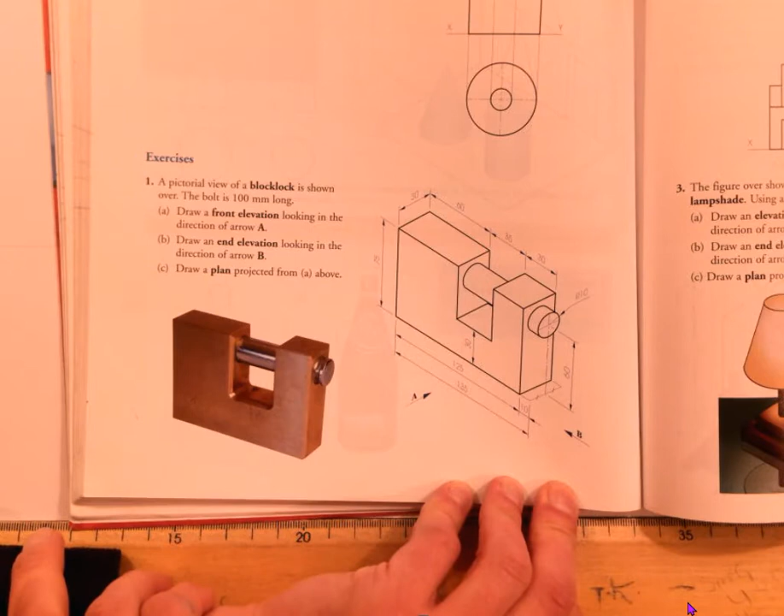Draw a front elevation looking in the direction of arrow A. Draw an end elevation looking in the direction of arrow B. Draw a plan projected from A above. So we go through the drawing.

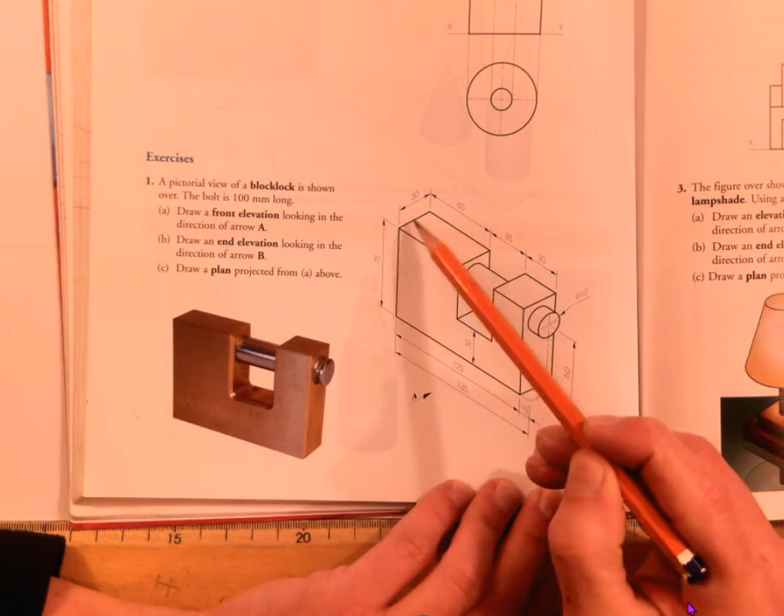I can see that the overall width, and it's not exactly clear straight away because it's a 125 and 135 mm measurement. The overall width, 135 millimeters. Overall height, 75, and the depth is 30. So from front to back, the depth is 30 millimeters.

So we go and we begin setting that up. So we said it's 135 wide by 75 high. So we're starting with our elevation. I put my XY line in already. Elevation, we're making it overall 135 and overall height 75. At that stage I can set up my outline elevation. Here is my outline elevation.

The elevation is broken up in the drawing, so there's measurements there, you can see them. We have 60 millimeters to step over to the start of the recess for the lock. 35 millimeters wide is the section for the recess of the lock, and then the end of the lock is a 30 millimeter measurement over.

So I've stepped over 60, 35, 30, and I've set up grid lines for those. So just light construction lines. All of this is very, very light. The recess of the lock comes up 30 millimeters from the bottom. So from the base up 30 millimeters. And I come horizontally.

And at that stage I can actually draw in the outline of the lock itself. The bolt or the pin has to be put in afterwards. So my outline of the lock is there, and that's pretty straightforward.

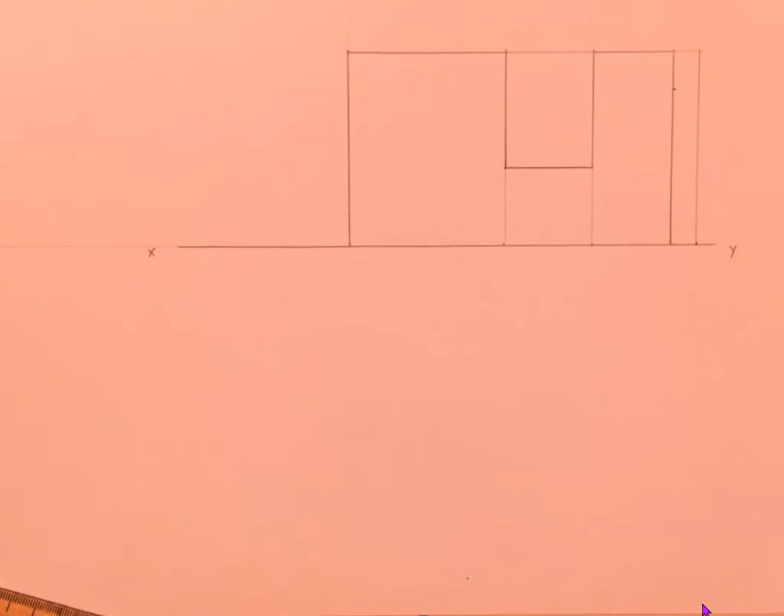To the center of the pin, so the pin has to come at the side here, to the center of the pin it says we have to come up 60 millimeters. So I measure up 60 millimeters to the center of the pin. That is a center line that's going to go on there. So in other words, the center of the pin is going to come along there.

In the question it says the pin itself has a radius of 10. That means it's got a diameter of 20. So it means the pin overall is 20 millimeters, meaning I have to step up 10 and down 10. And at that stage I can draw in the pin. So the bottom line of the pin is there. Top line of the pin on the lock is there. That is my elevation drawn in.

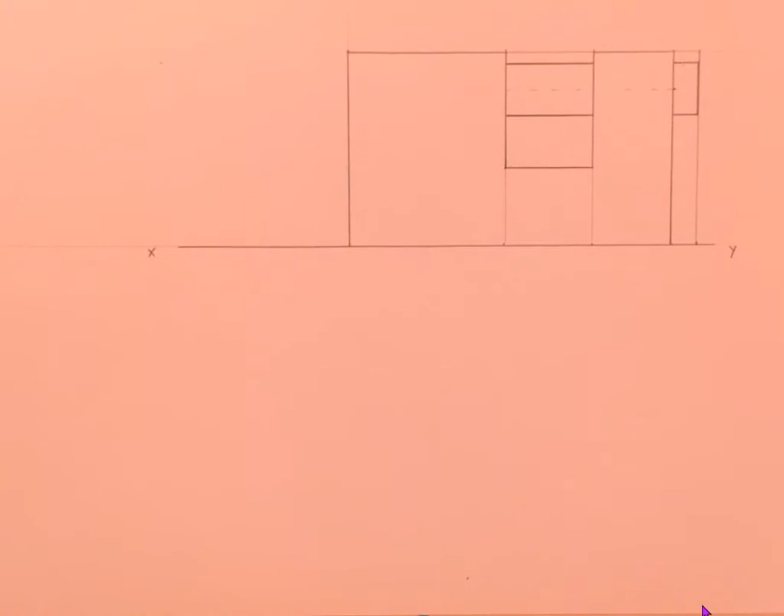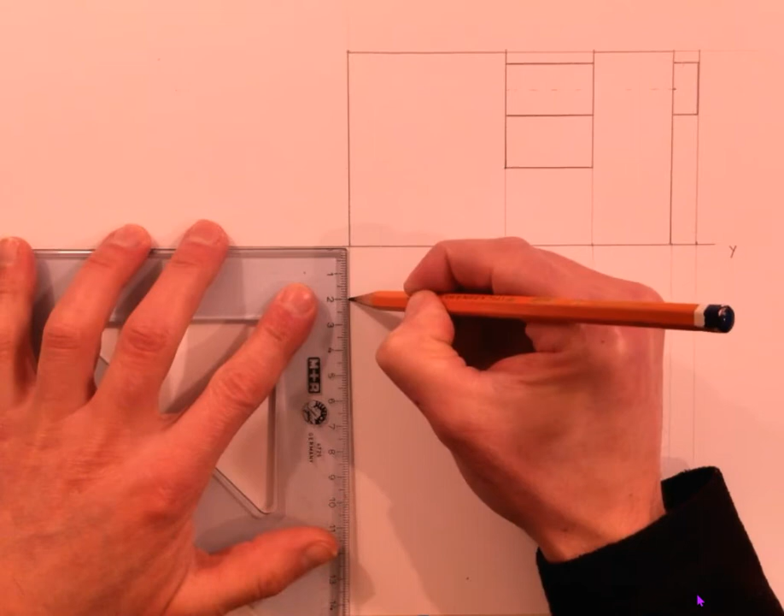Now I come along and project the plan view of that. Plan view is always projected from the elevation. So I take down my overall width, but I'm also going to take down the position of that recess that I was talking about, the end of the lock, and the far side of the pin. So all those measurements are taken down nice and lightly. We step down 20 mm always to start our plan view. So I lightly put in the start of the plan.

And we said in the question from front to back it was 30 millimeters deep. So 30 mm down. Once again, I can draw in the shape of the lock itself and the pin afterwards. So my lock without the pin is pretty straightforward. Here is my lock. But I need to put the pin into the center of this.

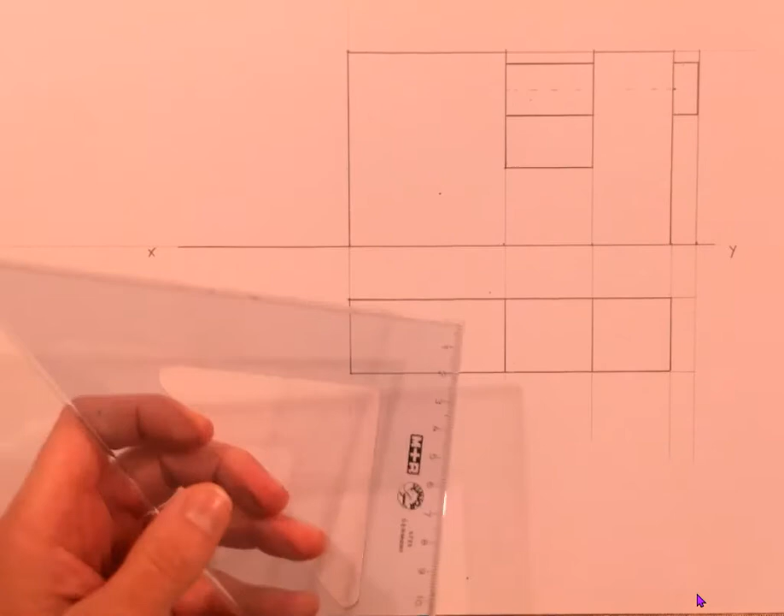So I need to find halfway. I'll step down 15 millimeters here because it's half of the 30, and I'll put my center line on again. So anytime we're dealing with something in the middle of an object, we put on a center line. There's my center line in.

Just as the elevation, it said the diameter of the pin is 20 millimeters. We need a diameter 20 pin in plan as well, the same, so I do the exact same again. Step up and down 10 millimeters. And then I can come and draw in the pin itself in plan. So that is my plan view looking down on top of the lock.

And that's it drawn. I have to come along now and project my end elevation. The end elevation, the view B, was looking in from the right hand side, meaning my end view is going to end up on the left.

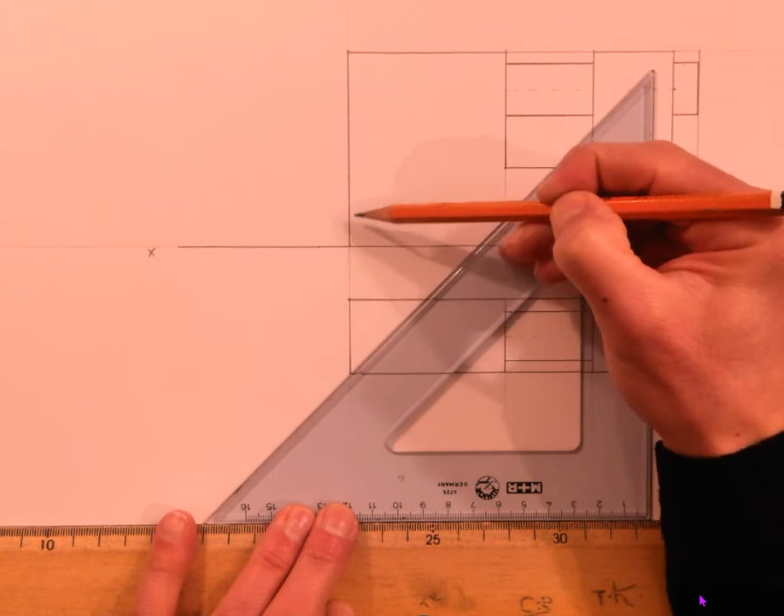The correct way to set up an end view is we have to use the elevation and plan to create an end view. To do that, we take the edge between the elevation and plan, this edge here, and where it hits the XY line, that point. From that, we're going to take out a construction line. I'm going to show it with just long broken lines. So we take out a construction line.

And what we're going to do is we're going to use the heights from elevation, and we're going to use the depths, so the front to back measurements in plan, to create our end view. To do that, I'll take the overall height of the lock over from my elevation, so lightly across, and I'm going to take the depth, so from front to back, from the plan.

To do that, I just come horizontally with my T-square and vertically from where it hits the line. So the line comes out, hits the 45-degree line, and up. I do the same with the other line. Across, hit the 45-degree line, and up.

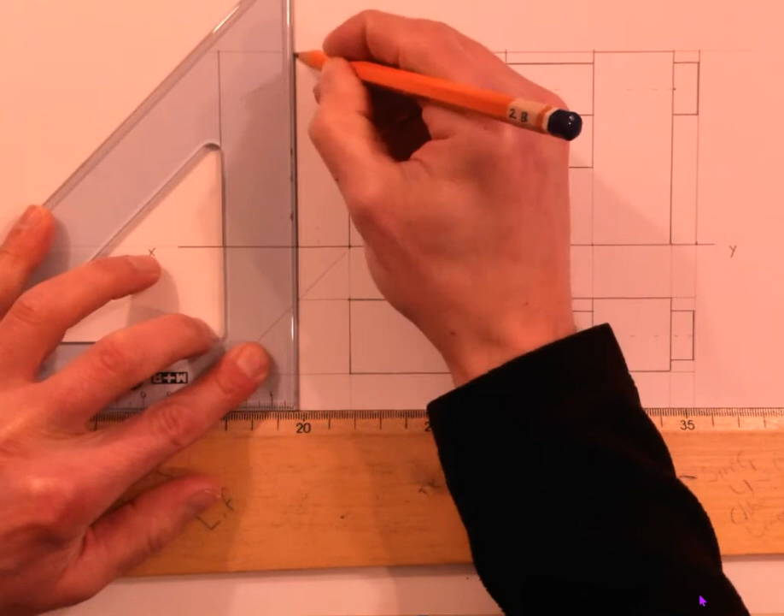And so what I've done is I've taken this 30 millimeter measurement and I've copied it into the end elevation. And that gives me the outline of the lock. So without actually using a measurement on the set square, I can redraw the end view.

Now what I'm going to do is take the center point of the pin, here's the center point of the pin, across into the elevation, because the height is going to be the same. So I take my center point across. So a center point comes straight across. The center point of the plan as well is going to come across.

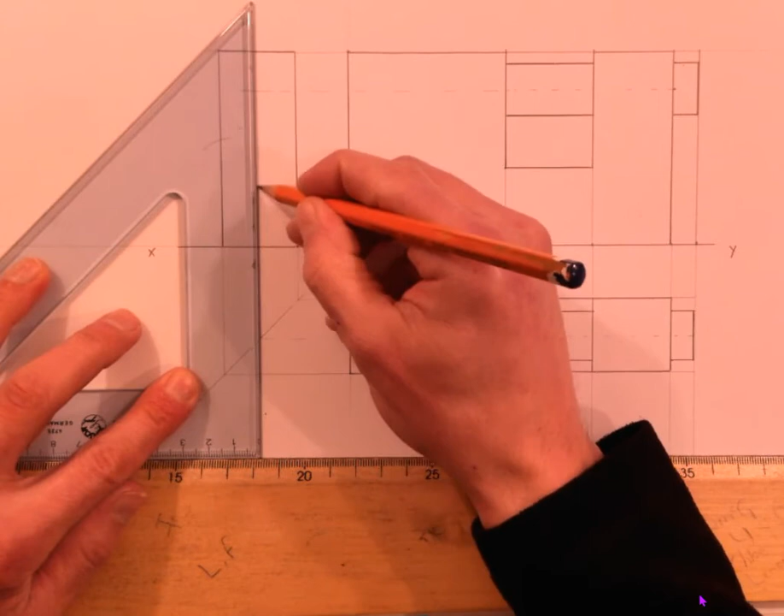And I'm going to bring that up into my end elevation. And what that gives me is the center of that circular pin. So took the height from elevation, took the depth from the plan, here's my depth from plan coming up, and now all I have to do is draw the circle in.

I can also use the elevation to help me find the radius for the circle. I'll take either the bottom or the top, it doesn't matter. I'll take my bottom distance over just for easiness. And what that gives me now is the radius for the circle.

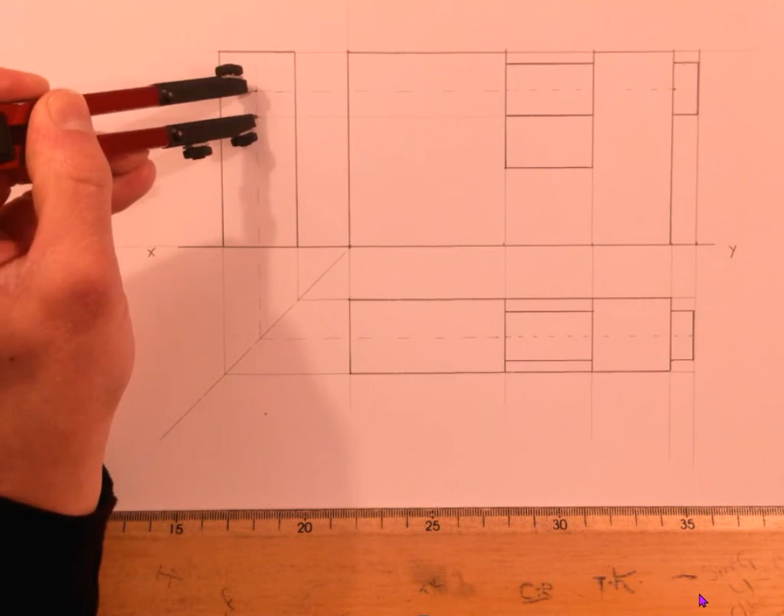When we're drawing a circle, we always need what we could call crosshairs. So in other words, the top and bottom of the circle and the left and right points. So it's basically a light cross. Last part then is I come along and I set my radius to the one that I brought over from the elevation, draw it in.

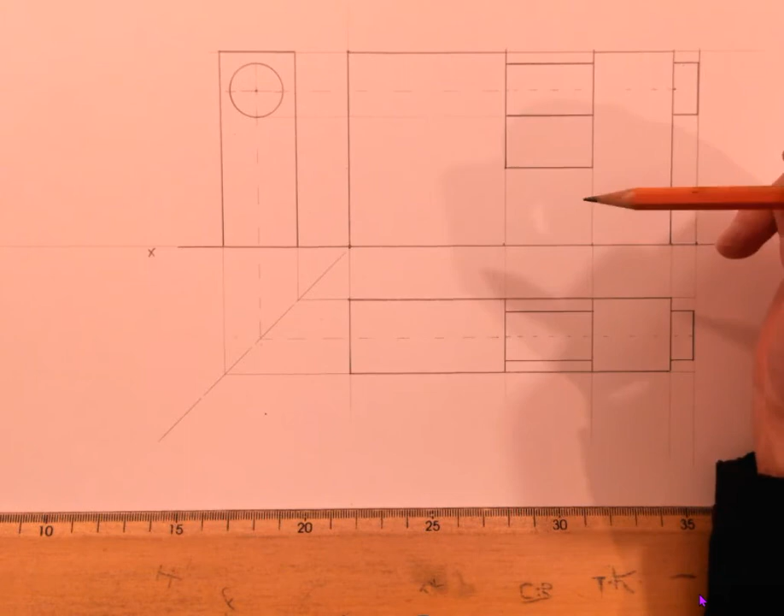The final part is, there's this recess cut out, or this section cut out of the lock. I know that's there, but I can't see it in the end view. When we know something exists but we cannot see it, we draw it with broken lines.

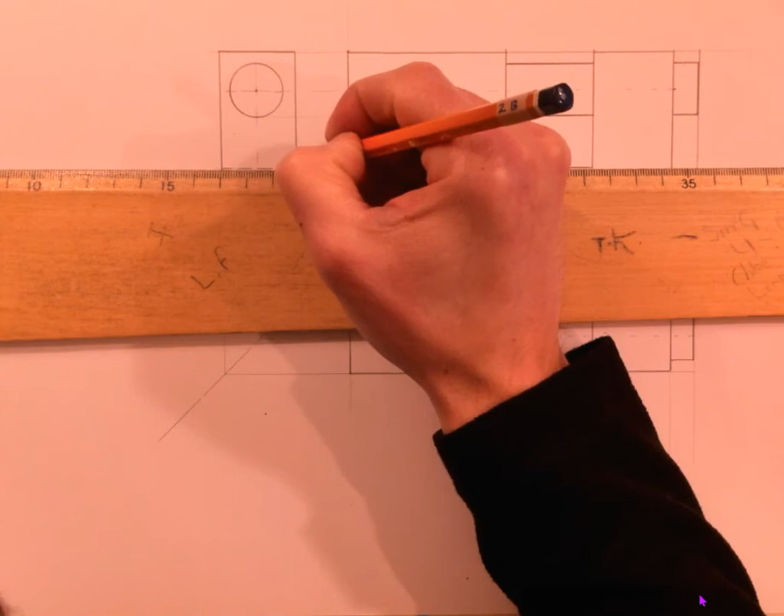So all I'm going to do is take my line across here. So I'm transferring the height across, and I'm going to show the bottom part of that recess as a broken line, dark broken line, to show that there's a recess there, but I can't see it. That is my elevation, plan, and end elevation.